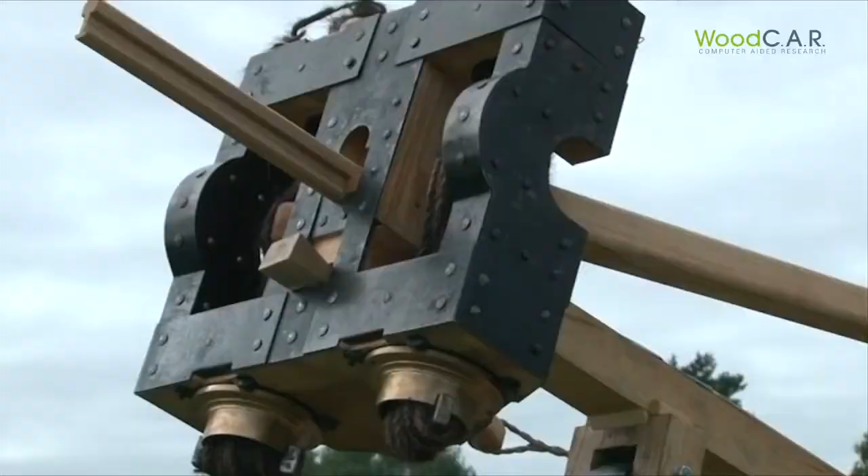Wooden bows and arrows are highly dynamically loaded, as well as the Roman catapulta shown here. Different types of wood were also used for different working and weapon equipment in the early and late Middle Ages.

Even in the Second World War, wood played a central role. Due to the lack of material, wood was used in the production of fighter planes. One of the most successful aeroplanes, the English Mosquito, was built almost entirely of wood.

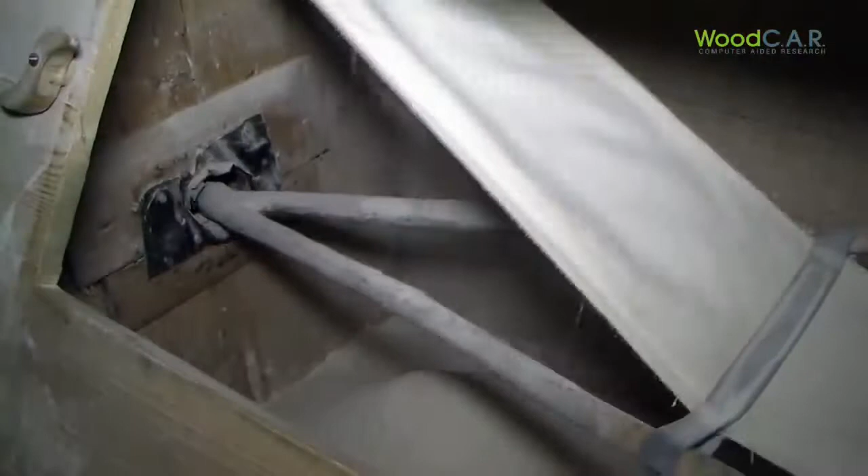Wood is also essential for musical instruments. The entire historical equipment and complex machines and constructions were produced out of wood until the 19th century. Recent studies show that craftsmen had a high level of empirical knowledge in order to use different wood species optimally for different applications.

Within the scope of a dissertation, we are currently investigating the resistance of wood to salt water, and despite thousands of years of experience in sailing across oceans, we have to notice that we have a lot of empirical experience but little scientific knowledge.

Tennis has been played for almost 800 years. Since only 40 years, we use other high-stressable materials than wood for producing rackets.

In cricket and baseball, the ball hits the racket head at the speed of 160 km per hour. The racket head moves in the opposite direction at more than 180 km per hour. Today we are able to simulate the enormous loads that occur in rackets.

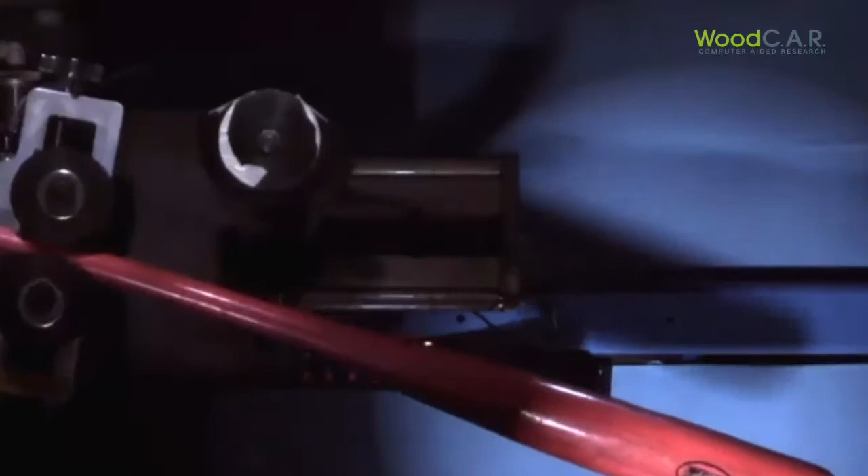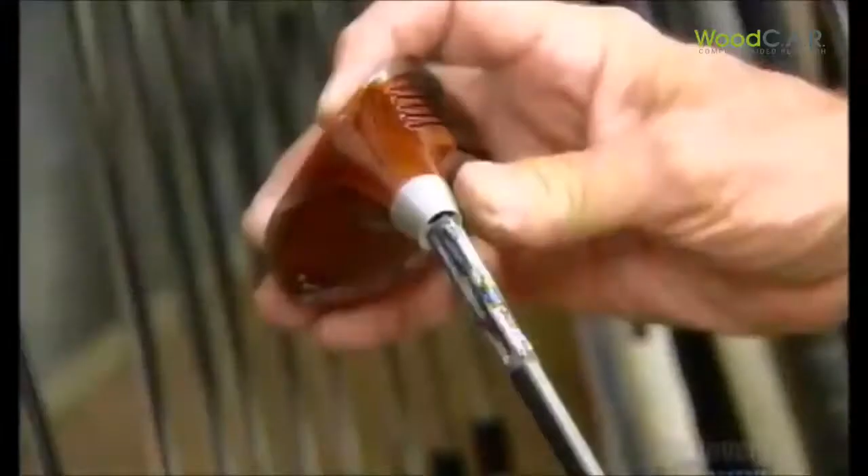Another sport in which the material wood has not yet completely disappeared is golf. Clubs are partly still made of wood today. Inlays of the club head are made out of metal and are glued to the club head just like the shaft. The wood surface is made durable, weatherproof and mechanically resistant by different layers of coatings. The ball is speeded up to 240 km per hour on the tee.

In a pilot project, we built different components of the concept car Colt, including the vehicle underbody, which was constructed corresponding to a skateboard. Master theses on wooden bicycles were carried out at several European universities, including BOKU. One of the master students made a business out of it and now makes wooden rims.

What we should keep in mind when we are looking at the achievement of sport legends and pioneers like Scott and Amundsen is the equipment they used. Wooden skis and sledges were used when they discovered the South Pole.

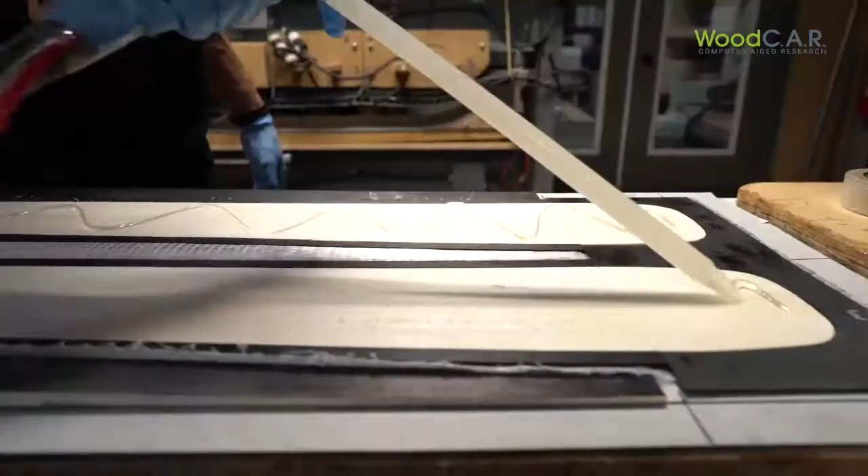But not only historical sport equipment is made of wood, every modern ski takes advantage of this material. Specially composed wooden cores give the ski strength and stiffness at low mass.

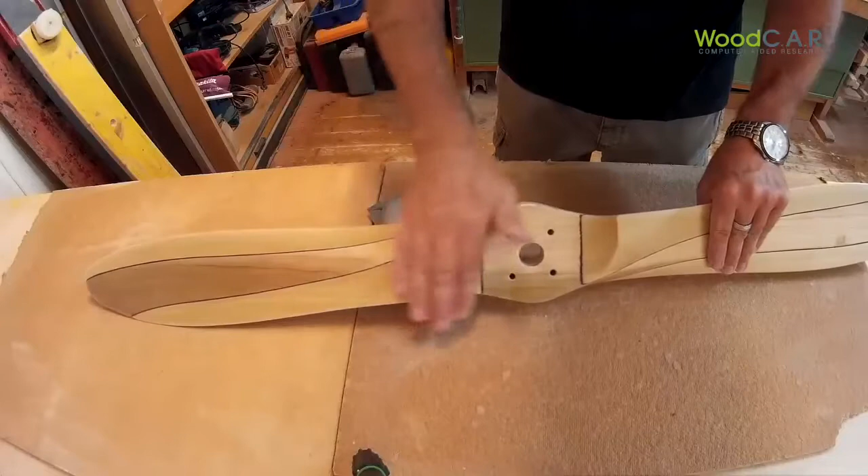The history of aviation is closely connected with the material wood. Even propellers are still made of wood today. The material withstands both environmental impacts and the enormous mechanical and dynamic loads.

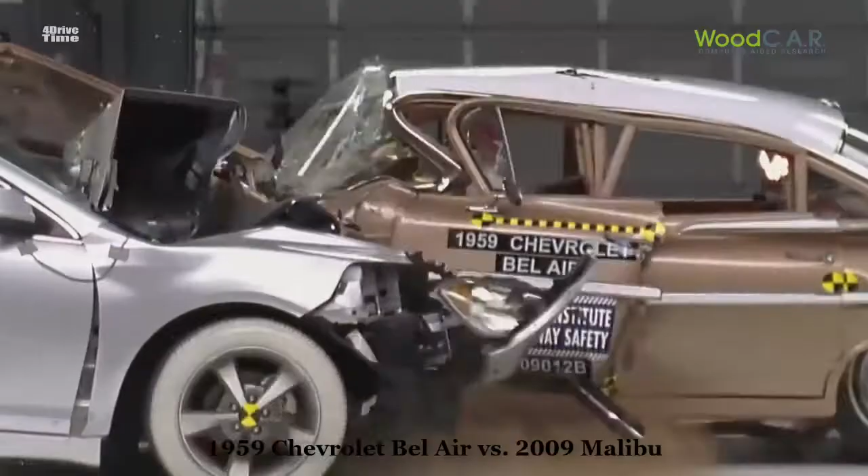There is no doubt that wood is the basis of historic aviation, but is the material also suitable for road vehicles? In older vehicles such as Ford or Chevrolet, several components were built from wood.

The crash behavior of these cars does not meet the requirements and safety standards. But were these old cars really crash optimized? Even for the occupants of the famous Beetle made of steel, the chances of survival in a frontal collision were significantly lower than in a modern car.

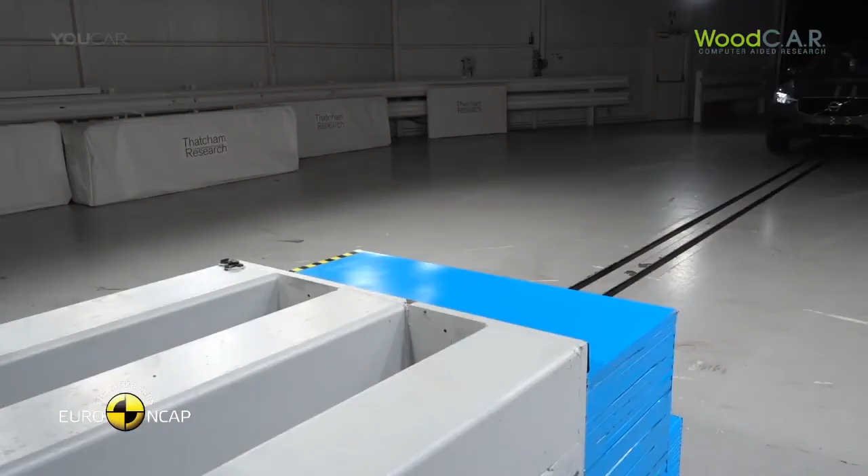The Volvo XC60 is one of the safest cars. Cruising with an old Chevy is probably much more fun, but in the case of an accident, the chances of survival in a modern SUV are much higher.

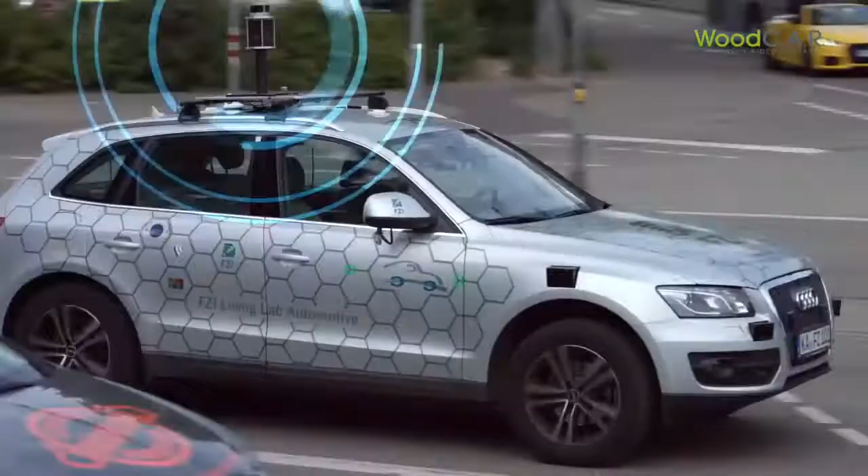But does this mean that wood cannot be used in vehicle constructions? With modern active safety, meaning safety systems that prevent accidents, vehicle constructions and safety concepts must be reassessed. From this perspective, the use of wood must be reconsidered. In addition to self-driving cars and buses, the urban mobility of the future will also include so-called people movers.

What will we find in these moving boxes? Wood. Why? From the moment cars are no longer driven by people, they will start to see the passenger compartment as a moving living room. And living is closely linked to the material wood.

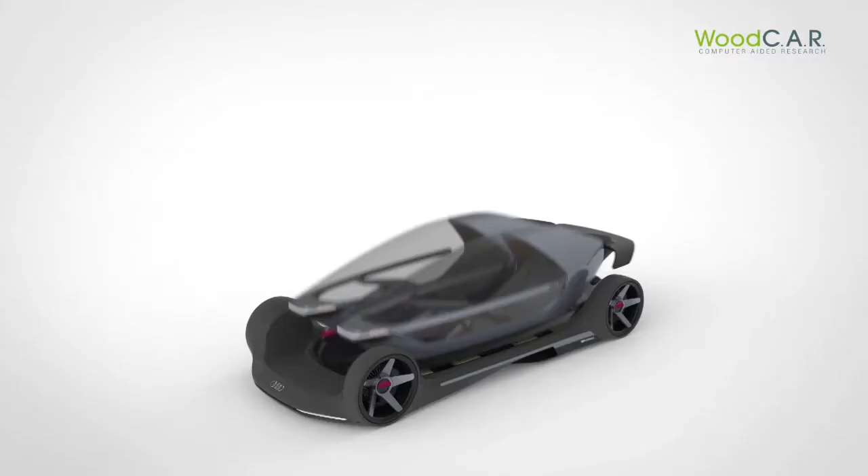Our industrial designers from FH Joanneum were responsible for the participation of Volkswagen R&D department in the WoodC.A.R. project. Two design studies were carried out in cooperation with MAN and Audi.

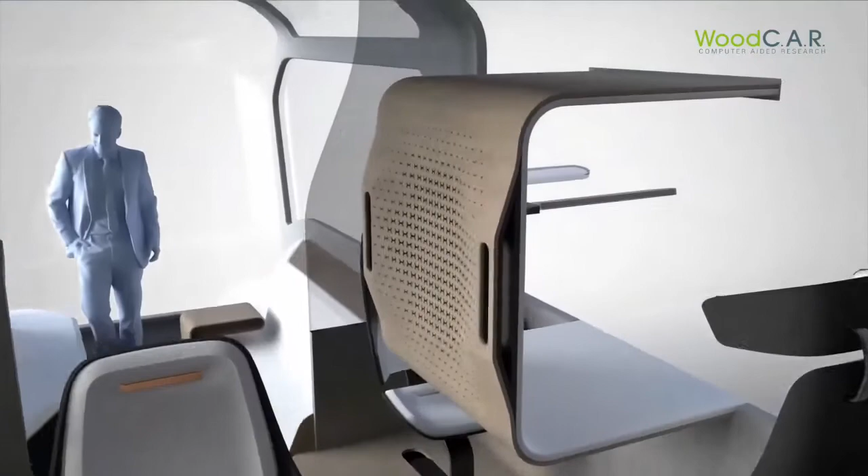Two concepts for self-driving buses with new wood design aspects were developed for MAN. A part of the passenger compartment of one concept was produced as a mock-up.

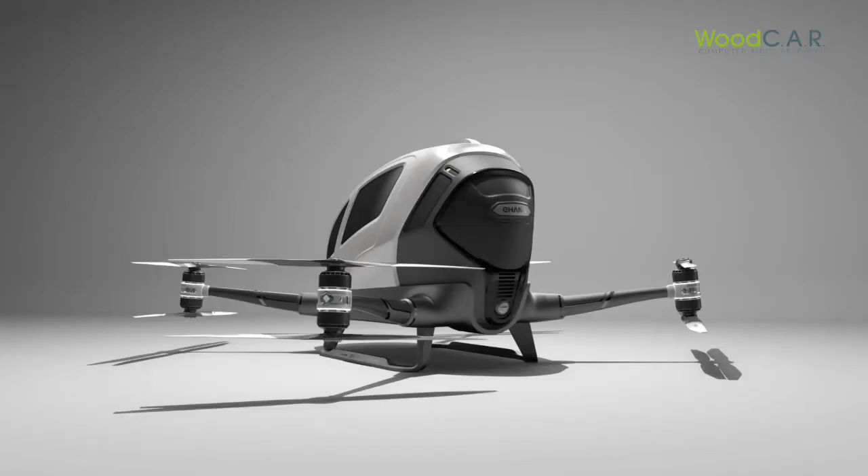But isn't level 5 old stuff? At the moment, several companies, also in Austria, are dealing with drones. Transport of parcels with drones is close to market launch. New projects deal with drones for passenger transport.

In this application, autonomous driving meets modern aviation technology. The high performance, lightweight material wood can probably play a central role in this field.

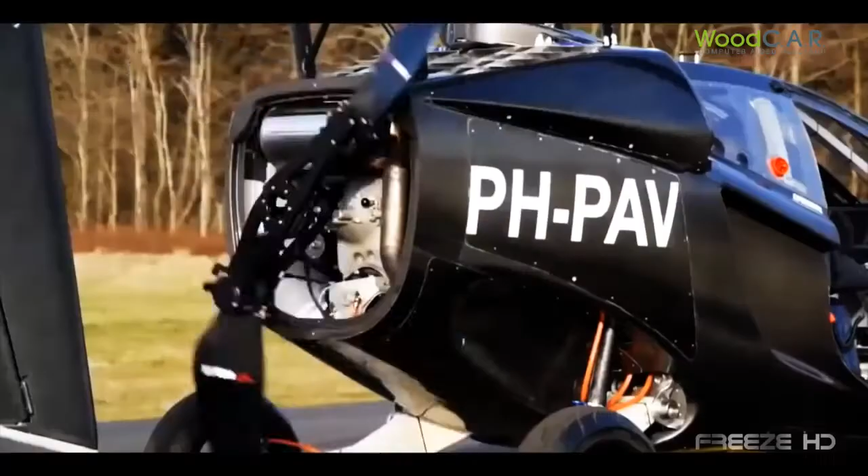In 100 years of aviation history, it has been proven that wood can give a valuable contribution to this sector. Let's take off with suitable ideas towards the mobility of the future.

At an intermediate state of development, you may find new vehicle concepts that we have not yet considered, flying cars or other hybrid vehicles. On the internet you will find some amazing objects.

I'm convinced that most of these concepts will not be part of future mobility. Nevertheless, these concepts can possibly contribute to radical innovation in this sector. And perhaps these vehicles will include wood as a high performance, lightweight material.

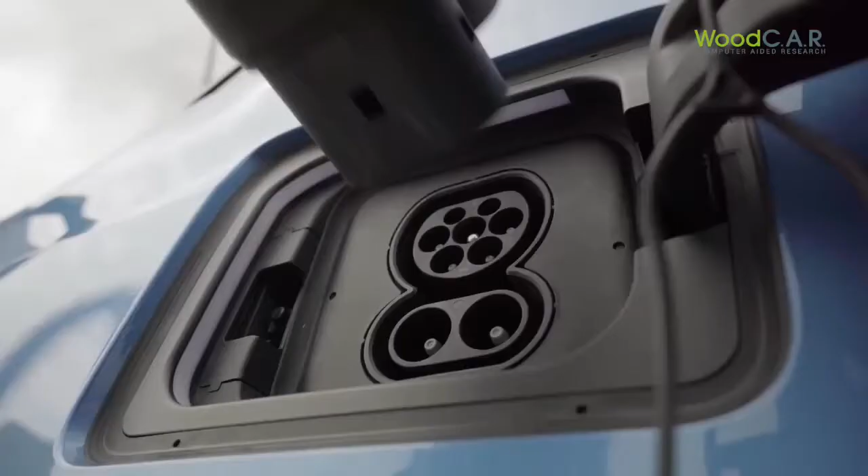But why is lightweight construction an important issue? Because about 25% of the energy required to move a vehicle is related to its dead weight, regardless of whether you use an electric drive or a conventional combustion engine.

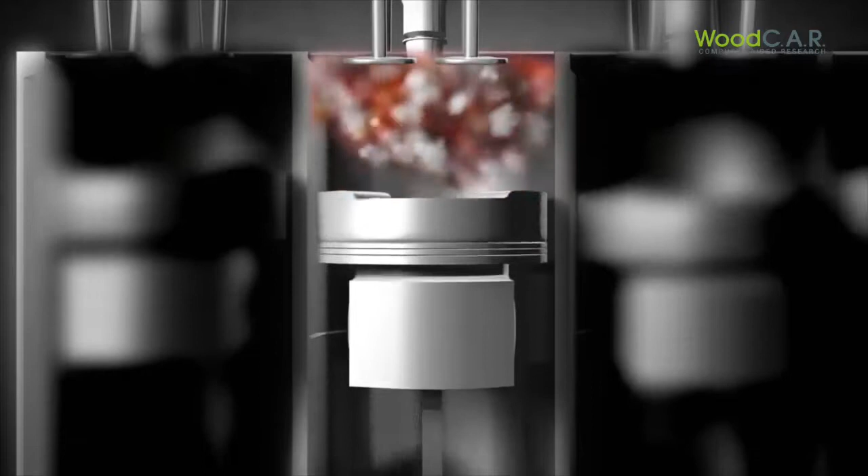The range of a car is largely determined by its own weight. With combustion engines, only small improvements in efficiency are possible, but lightweight construction has a much greater influence on energy consumption.

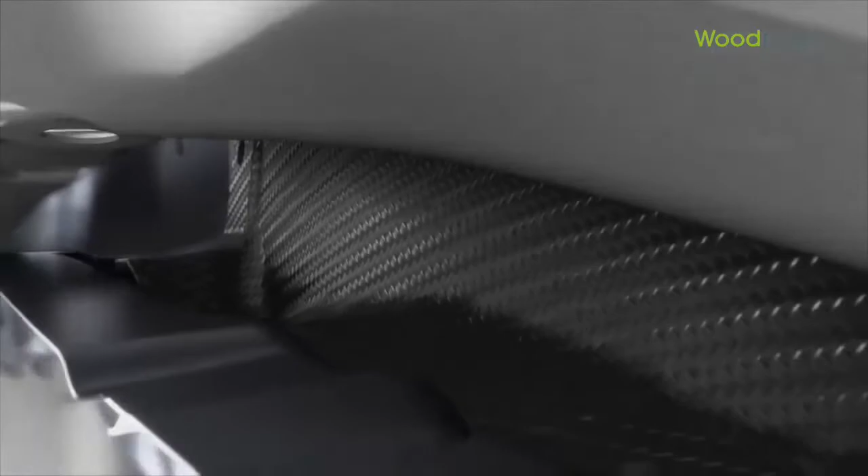However, not only established lightweight construction materials such as aluminum, carbon and glass fiber composites should be considered.

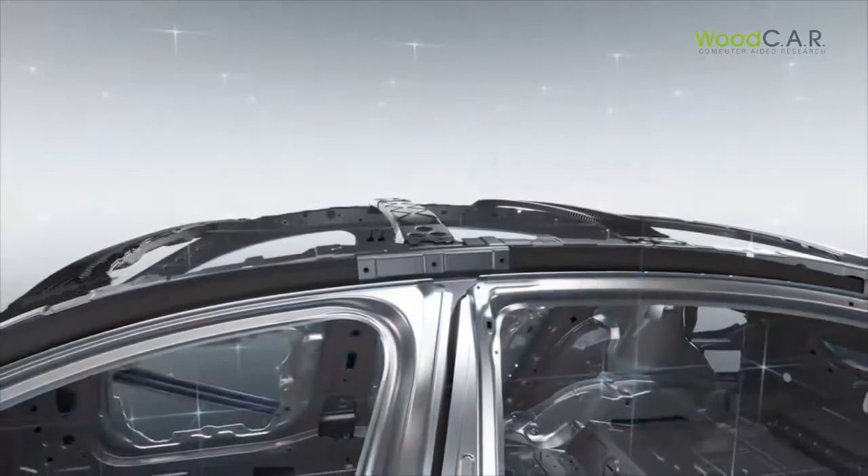Intelligent engineering opens up the possibility to achieve maximum performance at minimum weight. In this sense, wood can make a valuable contribution to future multi-material constructions.

Now we have reached the core topic of this presentation: wood in vehicle constructions, the Wood Car. This does not mean wooden cars. CAR stands for Computer-Aided Research.

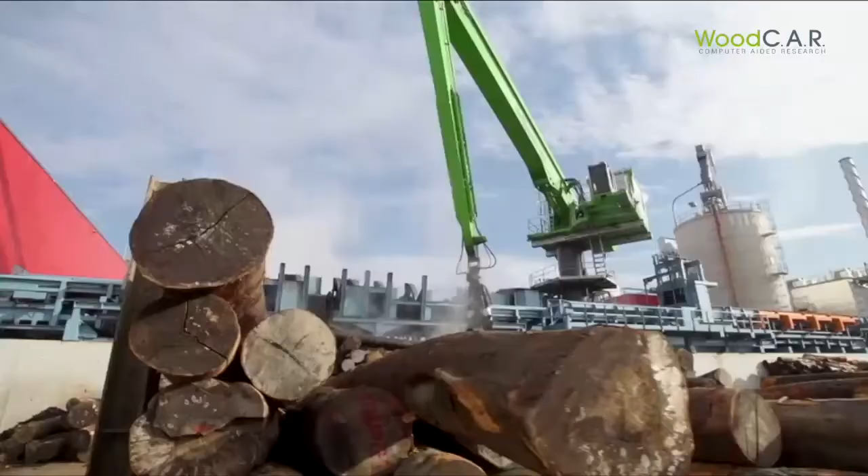We consider hardwood to be the most suitable material for such constructions. In recent years we have mainly worked with beech, birch and poplar.

It is not our aim to use solid wood elements, such as boards, in a vehicle construction. We rather think in terms of wood hybrid constructions, which consist of layered veneer composites. This is also in line with the solutions of other research groups in Germany.

But can wood really meet the requirements? There are not only mechanical and crash requirements that have to be met. Cars drive in deserts and are exposed to extreme heat.

All functions of a car have to be fulfilled even under extreme conditions and road surfaces: snow, ice, rainfall, temperatures ranging from -40 up to 80 degrees.

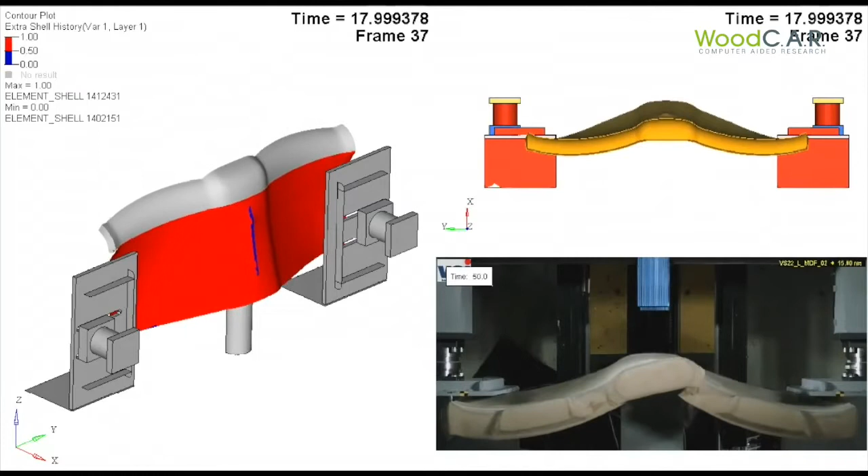Is it possible to simulate wood by means of finite element modeling? This question was the first big task we were confronted with.

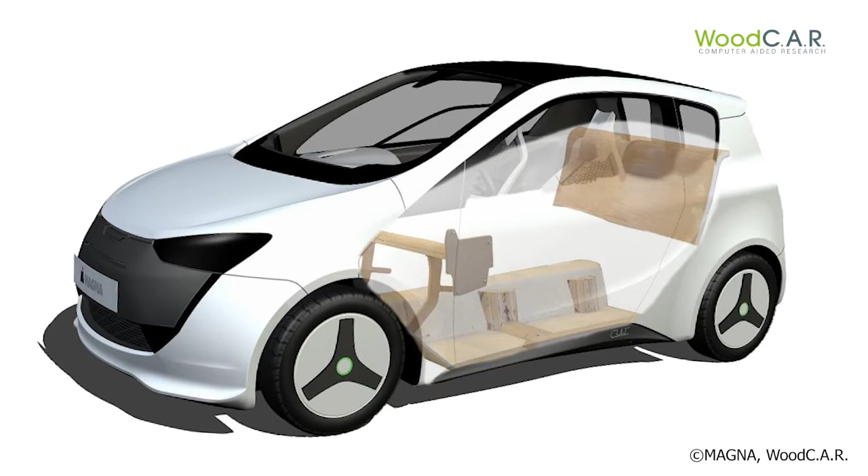There is no material that finds its way into the car world that cannot be calculated on a computer with modern software packages. Modeling and digitalization of wood was heavily discussed five years ago at the Styrian Future Day.

At that time, the majority agreed that this would not be possible. This opinion was not accepted.

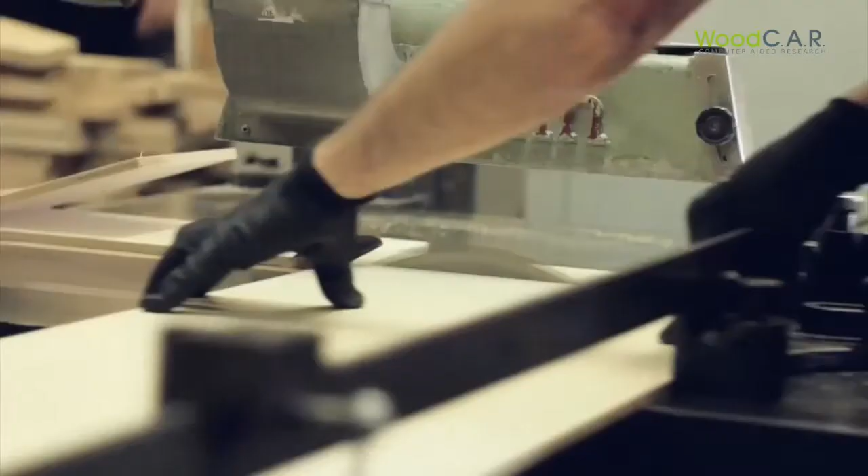A prominent supporter from then until now was Charles Morgan. Morgan Motors can look back on over 100 years of automotive history with wood.

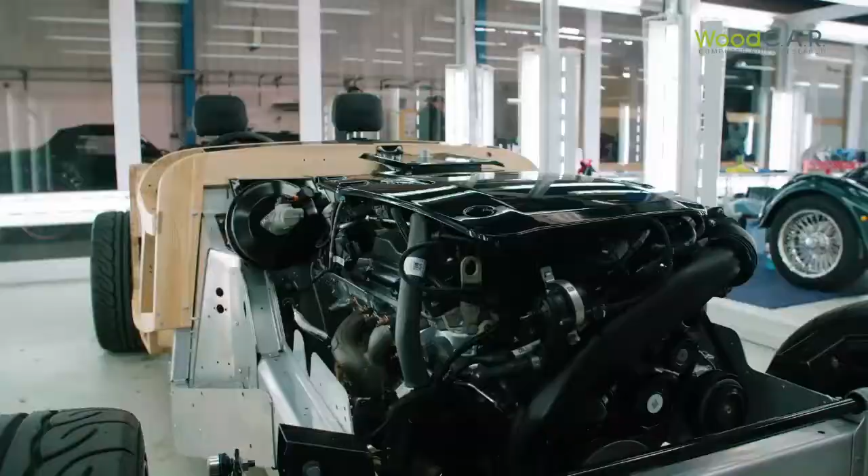These cars consist of an ash wood chassis covered with a thin aluminum sheet skin. In our discussions, Charles has repeatedly claimed that their constructions would even have an advantage over conventional vehicle constructions in the event of a crash.

Other research groups have been working on wooden concept cars before us. However, these research groups have not carried out any calculation or simulation on wooden elements.

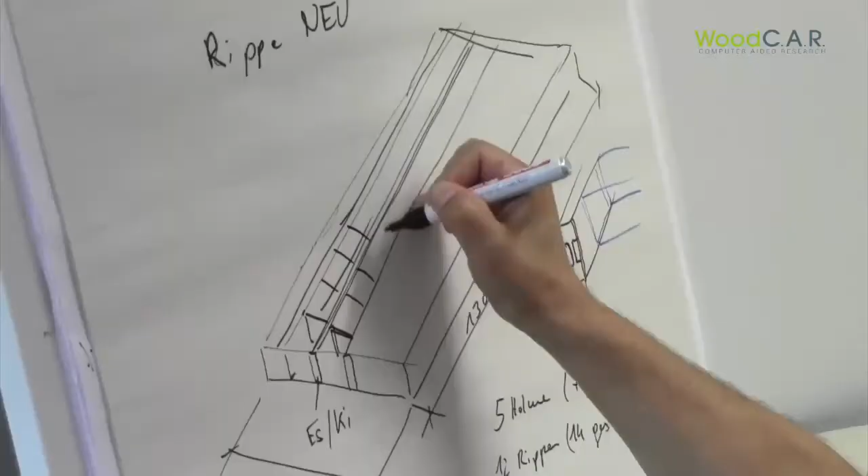Our goal was to prove, in cooperation with the University of Technology in Graz and the Virtual Vehicle Competence Center, that it is possible to calculate the mechanical properties of wood. Since the beginning of these research activities, we have been working together with the Weiz Energy and Innovation Center on the processability of wood hybrid components.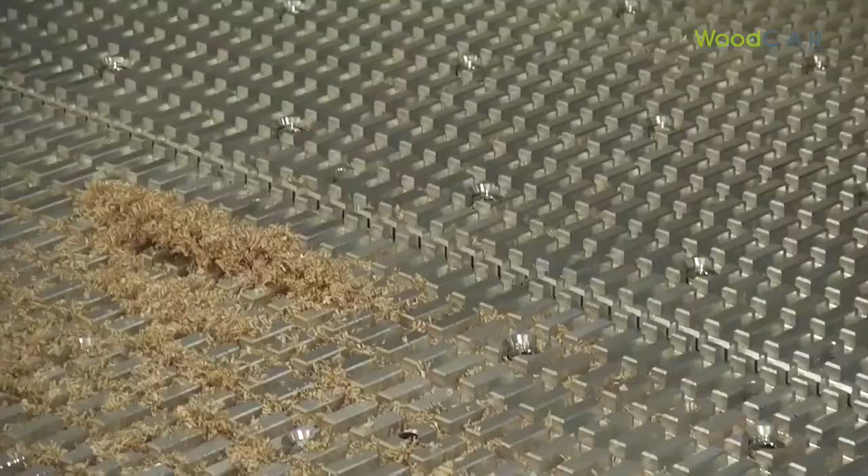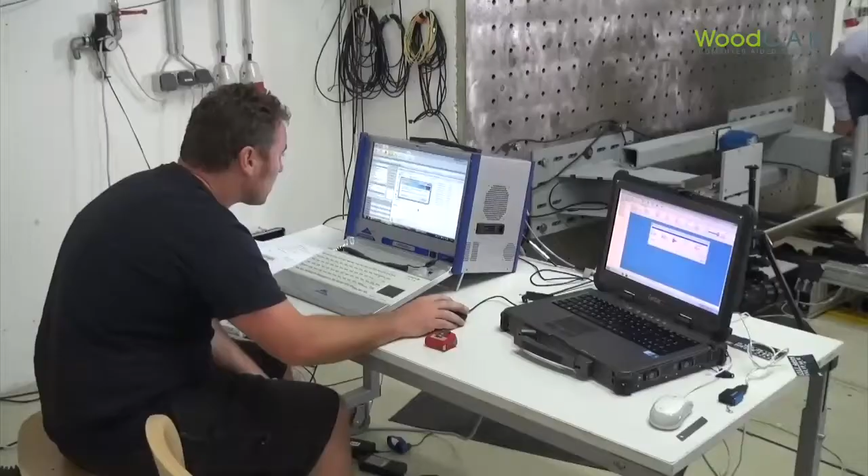In the course of the feasibility study performed in 2016, 3 parts of the concept car Kult from Magna Steyr were produced: instrument carrier, rear panel and underbody were designed, manufactured, simulated and tested. The aim was not to show that wood is better than other materials in terms of its properties, but that it can be designed and calculated for crash simulations.

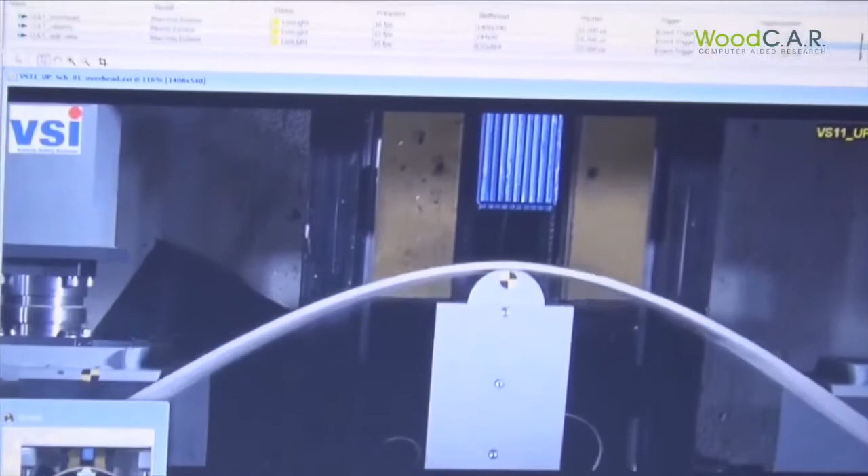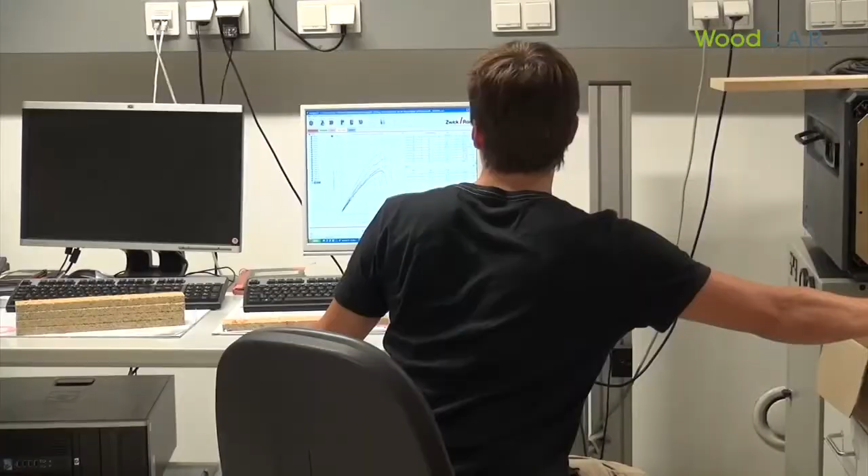The comparison between the images taken by the high-speed cameras and the simulation results showed good agreement. With the FE modeling, not only the time of material failure could be predicted, but also the failure behavior and the energy absorption. The simulation is based on material tests to determine the material behavior as well as the material characteristics in plastic deformation and failure. These parameters are determined by means of standard tests, and the simulation is subsequently validated by component simulations.

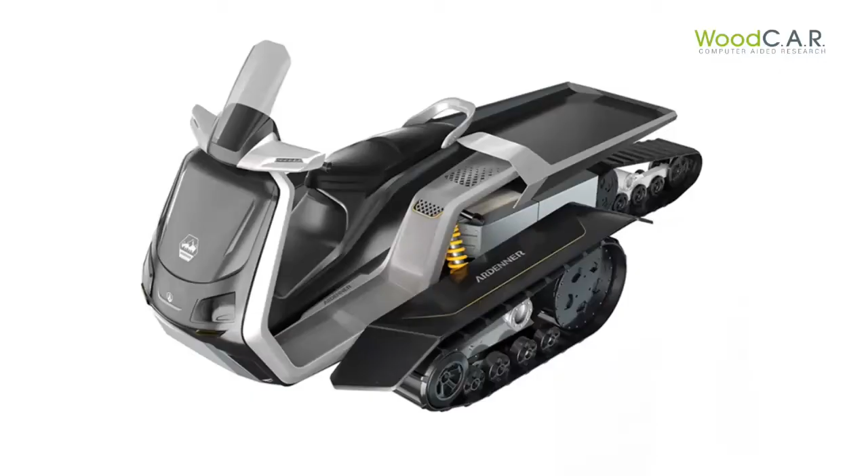In order to find further partners beside the core partners IB Steiner, Lean and Weitzer Parkett, we contacted the company Mattro in snowy Tyrol. The manufacturers of electric Caterpillar vehicles had a clear vision right from the start of the cooperation to develop a new concept of the snowmobile Ardenner. The first version of the vehicle was made of steel and was too heavy.

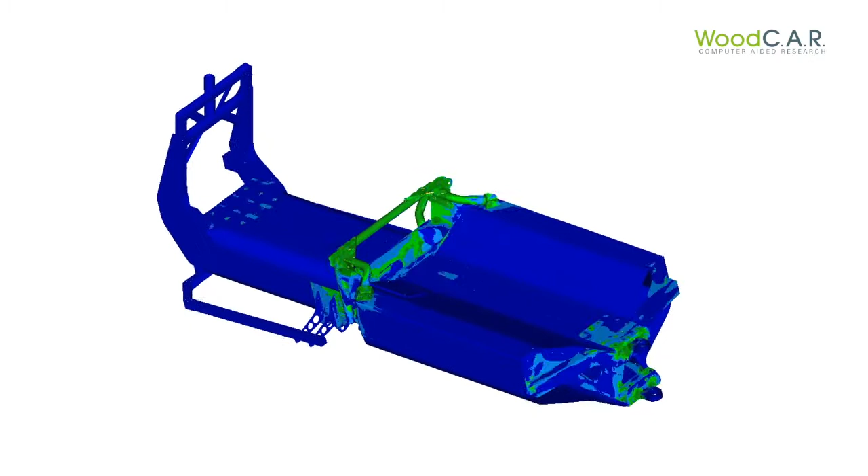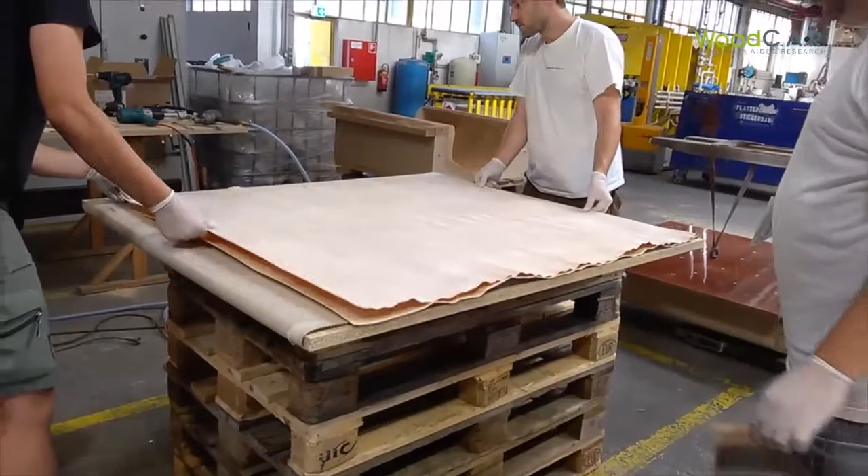A wooden chassis had to be developed to reduce their weight by more than 100 kilograms without losing performance. For this purpose, as many parts of the vehicle as possible were built from wood. The starting point of the design process was a so-called topology analysis, which was used to find an optimal lightweight structure. The technical design and construction of all components was then already carried out on the computer.

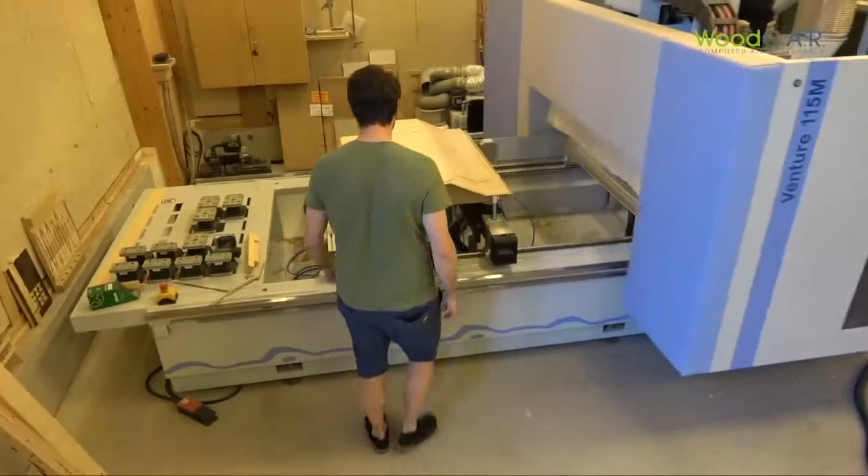Every screw, every connection, every element was subjected to the required loads of the entire vehicle on the computer before a demonstrator was produced. This meant that the development time of the Ardenna, including production, was completed in just 1 year. This would never have been possible with conventional methods.

The production was then carried out at BOKU and in Weiz. The individual work steps were precisely documented by the company Lean in order to have calculations available for virtual production layout. In addition to the process engineering knowledge, this creates the basis for a production concept.

Collano and EJOT provided the adhesives and fasteners, and Weitzer Parkett's production staff and almost the entire innovation department were involved in the organization of the production.

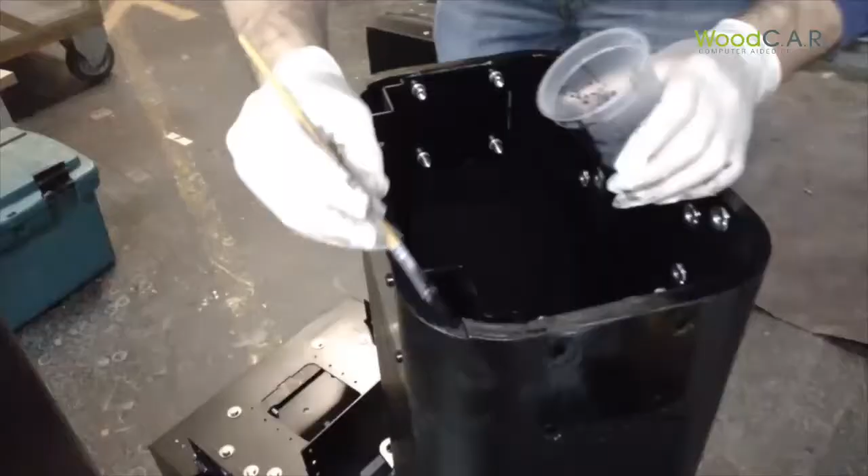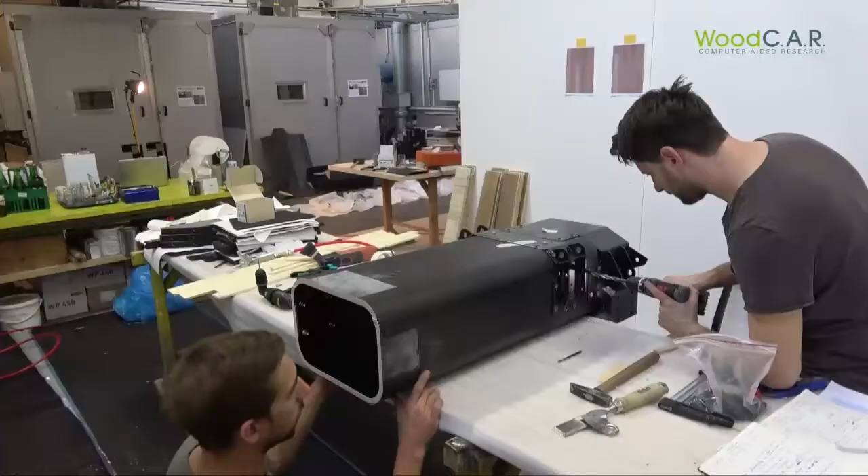The assembly of the vehicle was then carried out under the supervision of Mattro in Weiz. The elements were coated and glued and screwed together with metal and plastic parts. In some cases, some adjustments were necessary, but basically all elements fit together perfectly for the 3 prototypes.

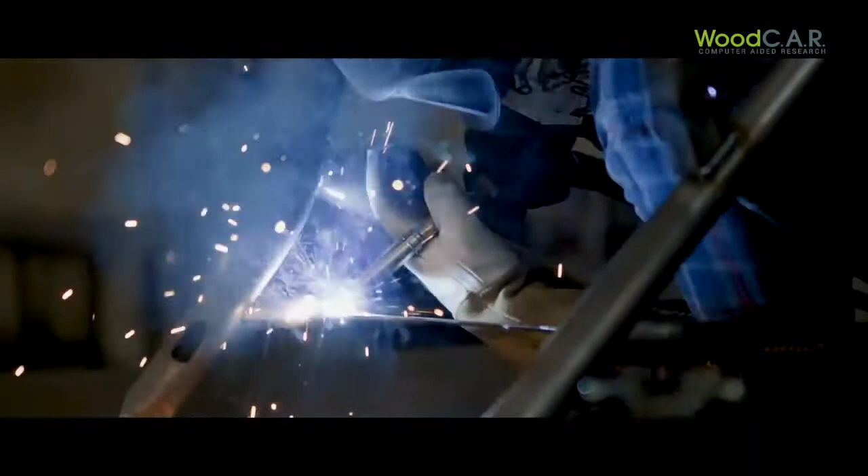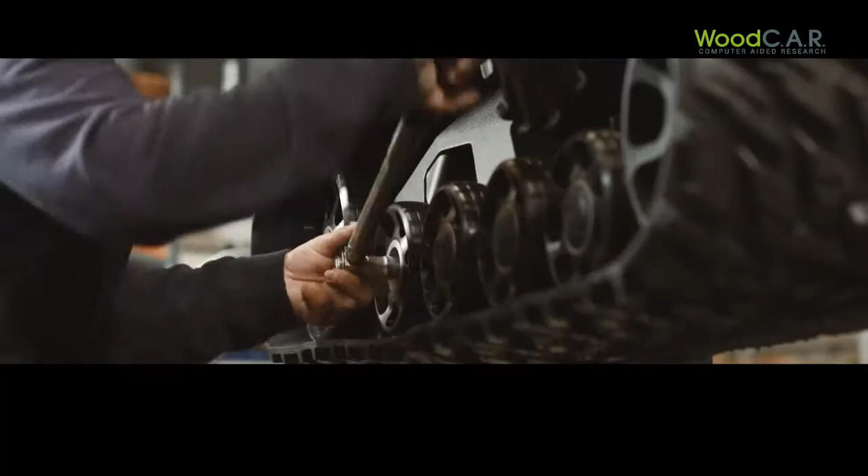One of the prototypes was then electrified by Mattro in the following month and equipped with all other attachments such as seat, handlebars, etc. The first test runs took place directly behind the factory building of Mattro, and last winter the first test runs were carried out on the ski slope.

The calculation from the life cycle assessment showed significant advantages for the use of wood. Only 5% material substitution in the European car industry would already mean $500 million more value added for the EU.

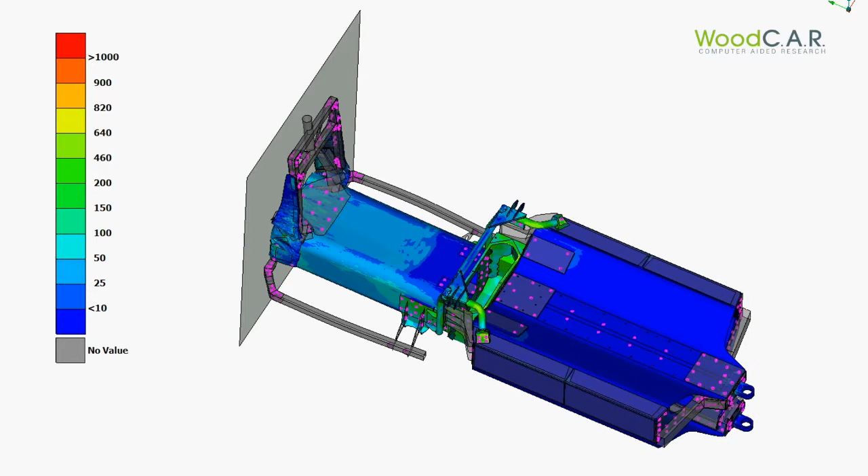Finally, one of the prototypes was crashed at the Technical University in Graz. Not frontally, as shown in the simulation here, but the chassis was steered at 30 km per hour against a 45 degree inclined ramp. The test showed no component failure.

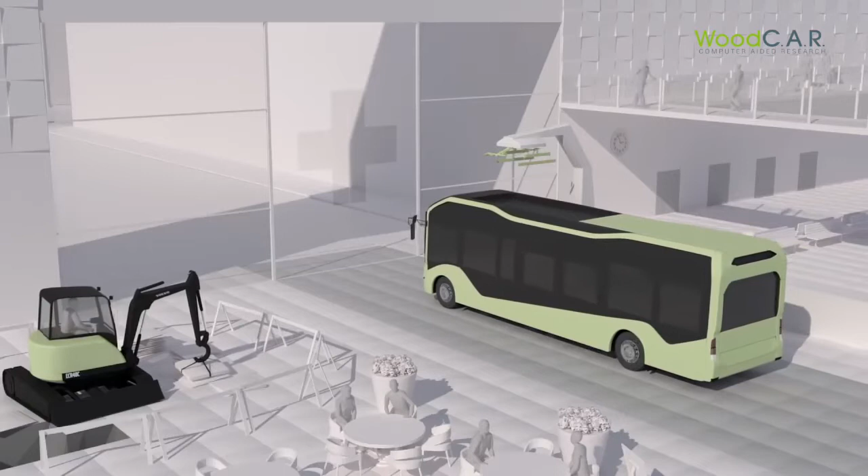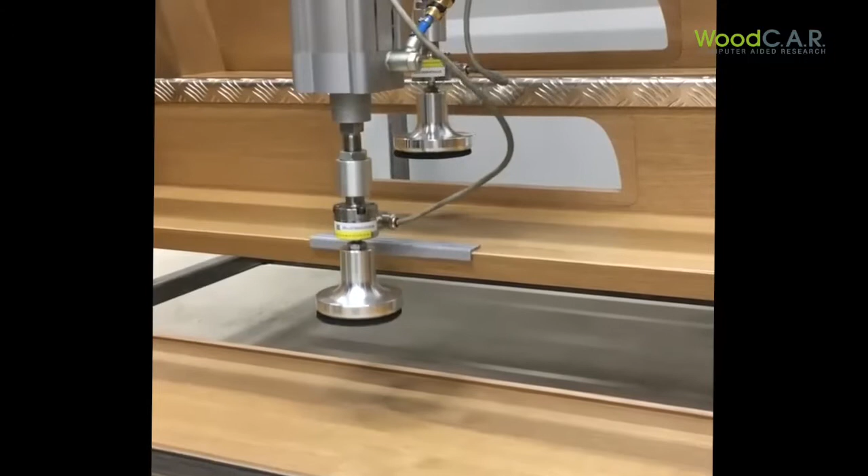Parallel to the development of the snowmobile, a bus staircase of an entrance area of a traveling bus was designed and built for the MAN company. The task was to build a staircase from 100% organic components. Only adhesives and coating material are not of organic origin. With the developed design, it was finally possible to save almost 20% weight with the same performance.

The last partner to join the research work of the Woodcar Consortium was the Research and Development Department of Volkswagen. They carried out 2 corresponding research projects in Germany. In Woodcar, the research group has the task to develop a so-called body in wood of a fun car, the beach buggy.

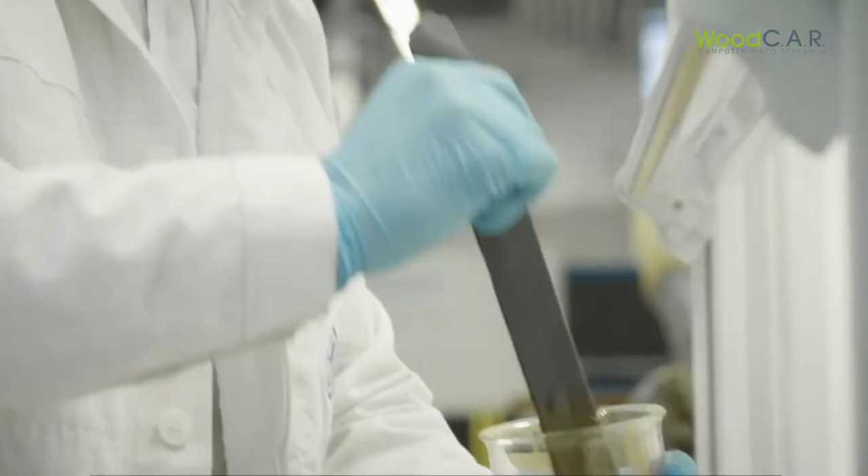Corresponding to the other applications, all development steps took place on the computer. The final task in Woodcar will be to construct and build the overall frame of the vehicle on a 1-to-1 scale. Magna wanted to challenge us by assigning us the task of developing an element that is only relevant to crashes, namely the side impact beam of a car door.

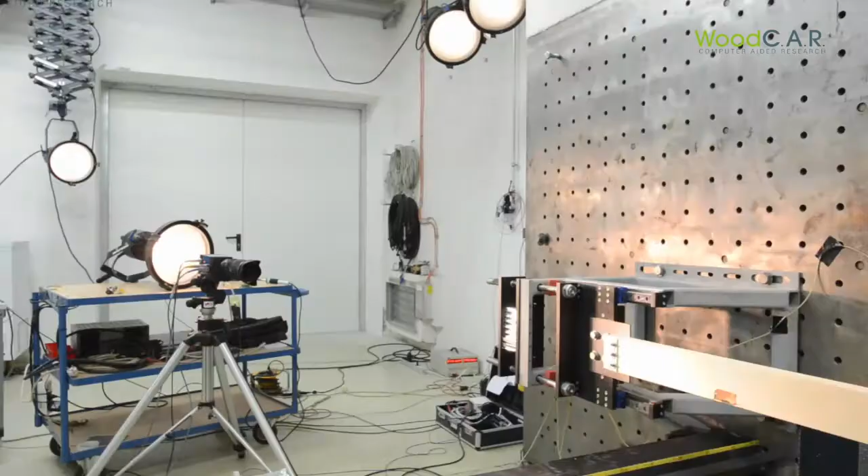This component is usually made of high-strength steel. In addition to the penetration depth, the force transmitted by the beam also plays a central role in a side impact. For testing the impact beam, a new sled test setup and a test frame were developed which simulates the surrounding vehicle structure.

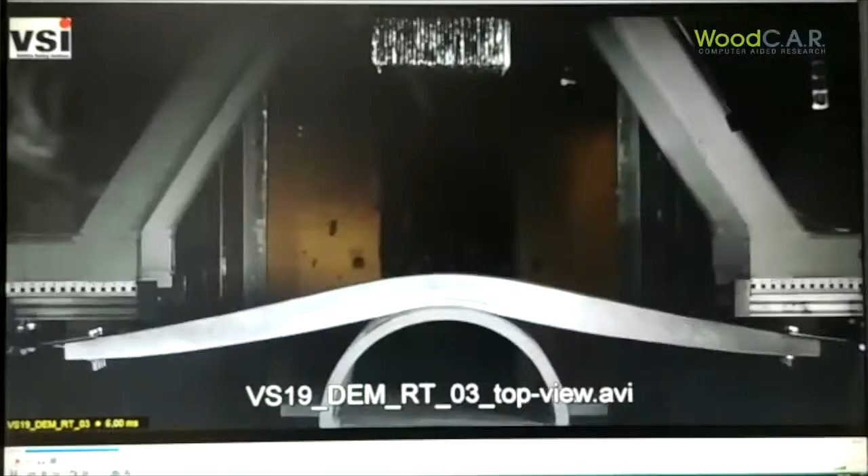In crash testing, the preparation time is long, but the testing time is extremely short. The prediction quality of calculation is excellent. The comparison between simulation and real test shows perfect agreement. The element meets the requirements and has been successfully patented.

During the various optimization loops, we asked ourselves whether we could learn from nature for crash-relevant elements. There are several structures, such as the branch-stem connection, which have to withstand extreme loads. Within the scope of a dissertation, we dealt with such structures and examined not only wood tissue, but also the inner structure of mussel shells and nacre. We reconstructed such a shell structure from wood and observed effects of high homogenization and increased energy absorption.

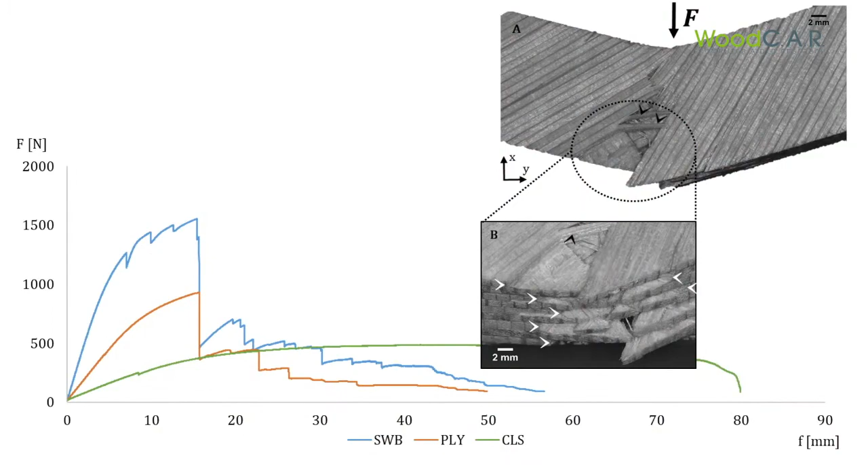The number of studies and research carried out is extremely high, so not all of them can be mentioned here in detail. We have studied the influence of weathering and varying temperature on wood and have carried out mechanical tests at -40 to +80 degrees.

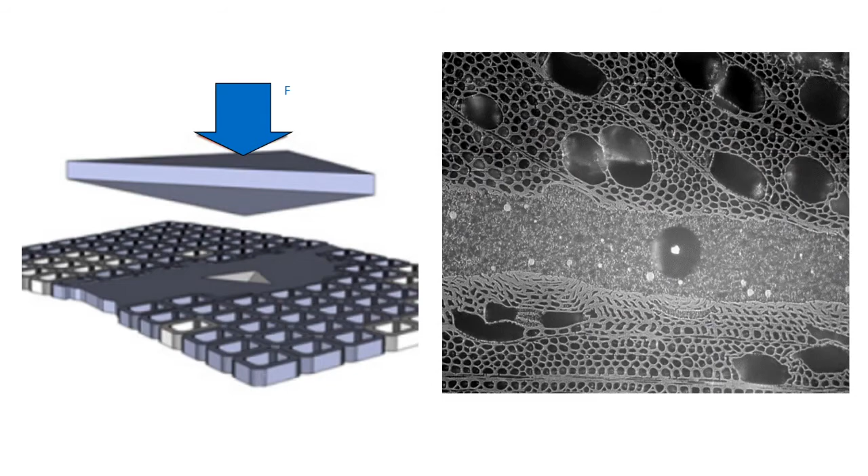We have performed well over 700 screw tests and modeled the material behavior. We have described the screw holding capacity, examined the media and salt resistance of coated and uncoated laminated wood samples, examined adhesives on a microscopic and macroscopic level at different temperatures, and describe adhesive bond lines in FE modeling.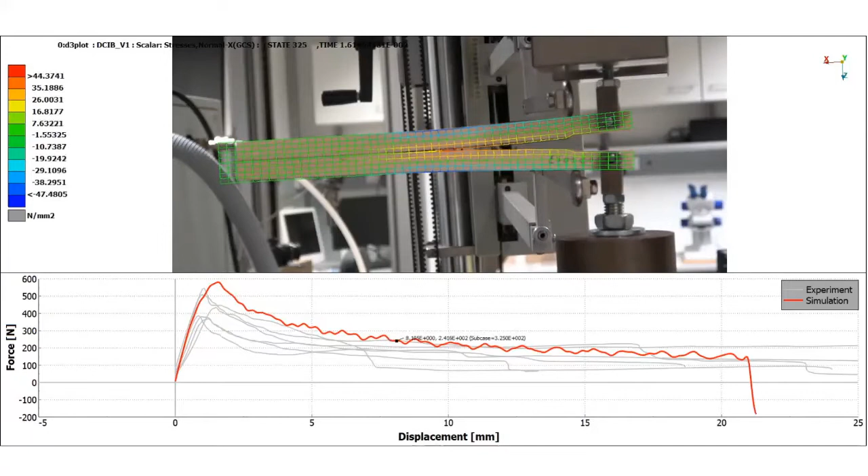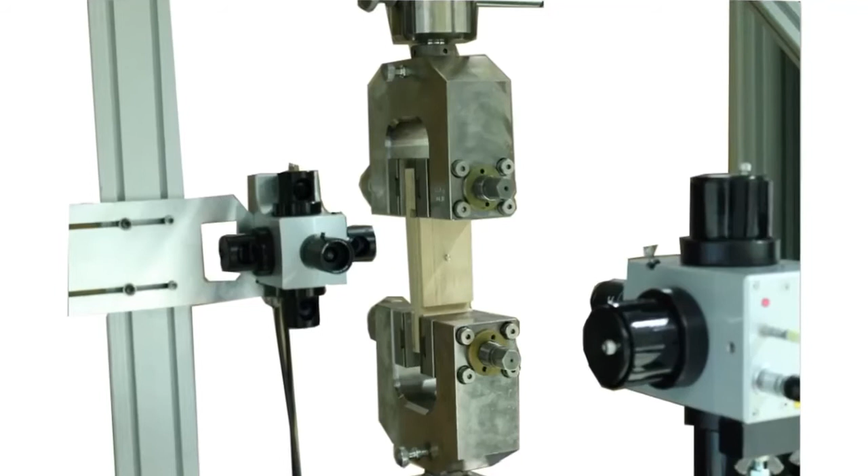We developed new tests with advanced measuring devices to observe the shear behavior and to measure Poisson's ratio of solid wood. And most importantly, an amazing high number of material tests were carried out to describe the material behavior of beech, birch and poplar. The amount of work necessary was far underestimated.

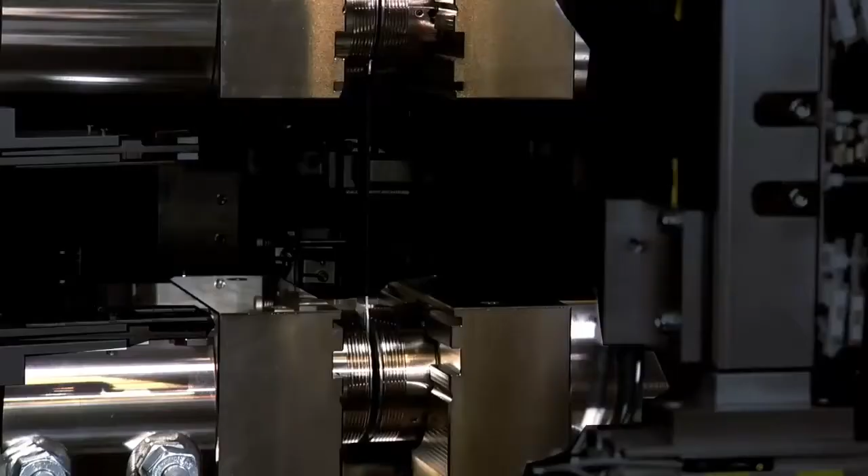If we had to repeat the mechanical tests, we would only do so with the help of an automated universal testing machine that would automatically test this large amount of sample material. The data management alone was a challenge. A database was set up at BOKU specifically for this purpose.

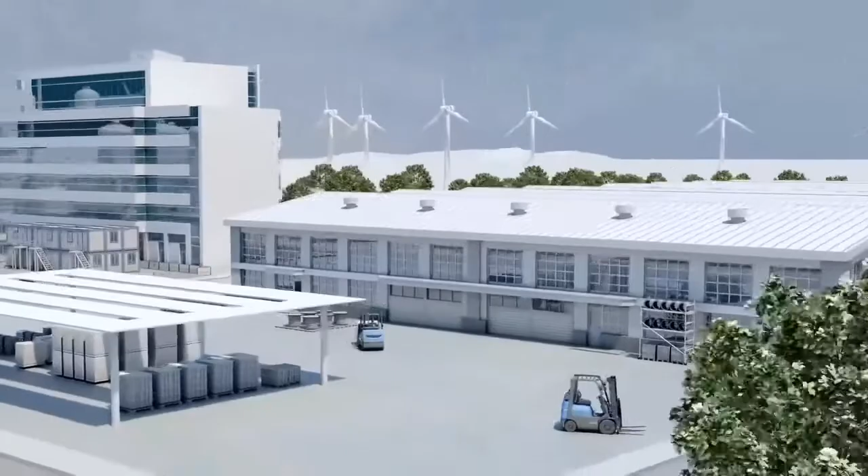With modern data processing and new solutions for digitalization, we are moving towards the planned research project CARpenTiER. The letters CAR stand for Computer-Aided Research and TIER means supplier in the automotive industry. With this research project, we want to show that through the digitalization process, the inhomogeneous material wood can be controlled even with high product requirements and strict quality specifications.

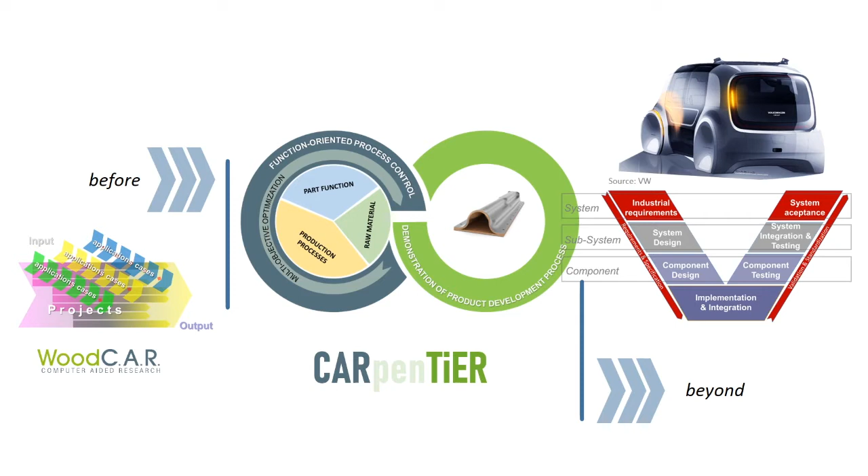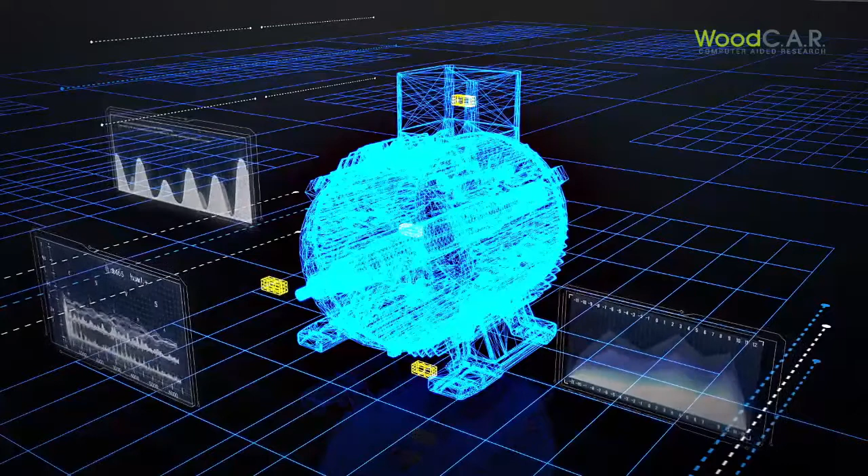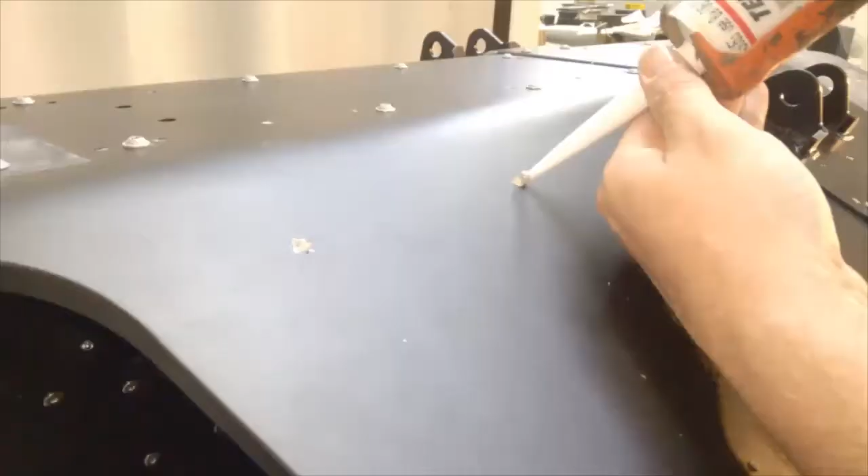We do not only want to create digital twins of the individual components for dimensioning and technical design, but also to describe the individual production processes using digital models. This will enable us to improve, control and monitor the production processes. Laminated wood and wood hybrid materials, meaning wood components in combination with plastic and metals, as well as with other materials, including fiber-reinforced materials, will be the focus of future research work.

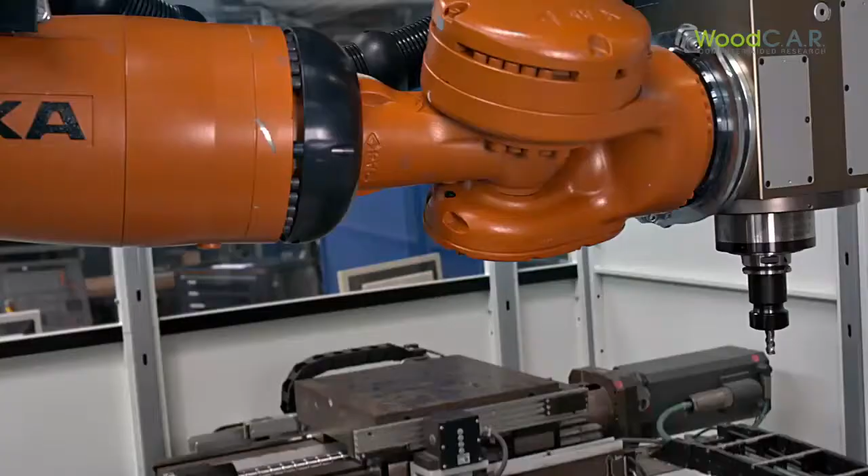The core of the research program is the so-called function-oriented process control. All possible influencing variables are to be recorded and described by physical models. This requires further research work in the field of material science, process engineering, quality control, and simulation.

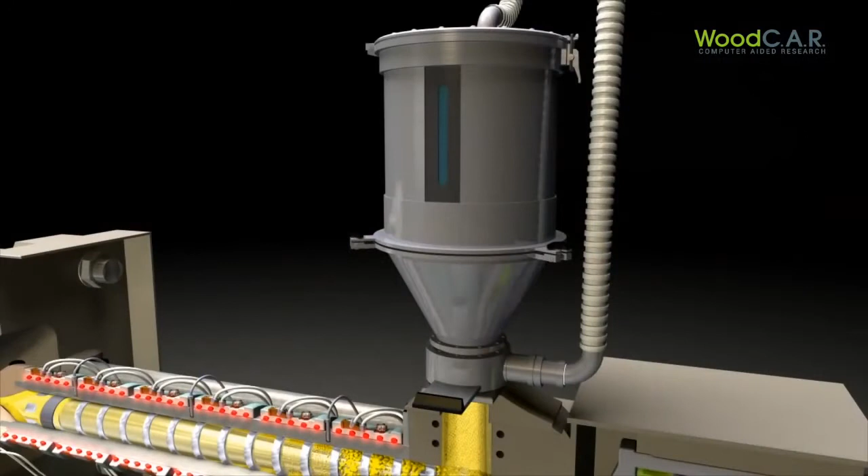In summary, after 5 years of research, it can be said that wood can also find its place in the mobility sector. Future research will focus primarily on the production process, thus creating the basis for industrial production according to required standards. A new safety concept and the combination of human skills and knowledge with computer technology will shorten development times and reduce costs.

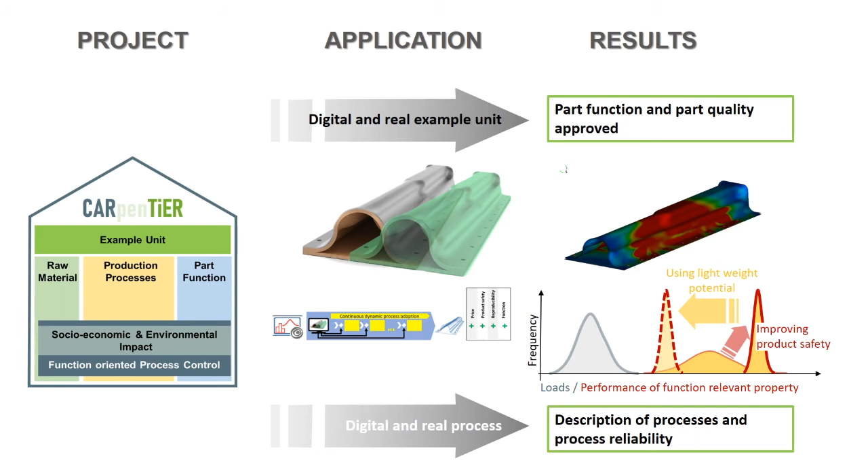In addition to the areas of application targeted so far, we are convinced that the newly developed competences of the consortium will also create new markets for the material wood in the long and medium term.